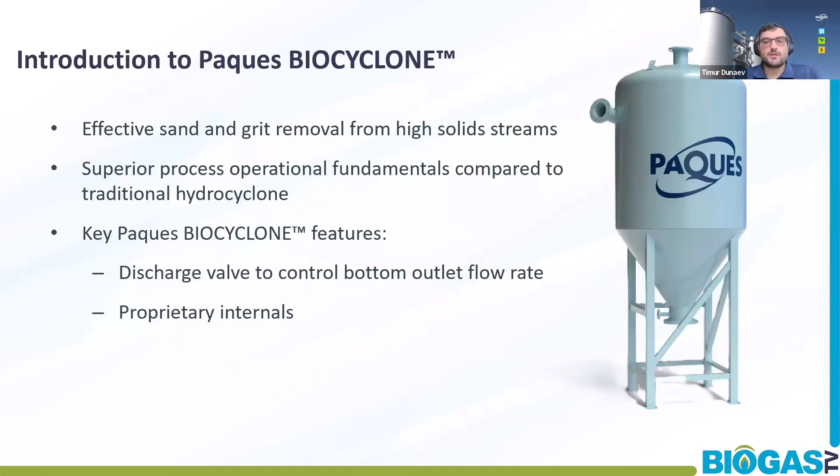All of that in one enclosed, well-controlled system, which is applicable and appropriate for biogas systems. Let's make a comparison. We remove solids by centrifugal motion, same as in hydrocyclones. But if you're familiar with hydrocyclones, the reason they're usually relatively small is because you do not control the back pressure. The main driver is the delta P across the hydrocyclone, anywhere from a couple PSI up to 20 PSI, depending on the application and what you're trying to separate.

The delta P across the pressure drop, combined with atmospheric pressure on the discharge side, is what's driving it. So when you go into higher flows or higher volumes, there are two risks associated with using hydrocyclones, even multiple of them in parallel. You do not have the thickening function, you'll be separating everything based on the difference in specific gravity and the amount of force applied, but then you're also losing the VS. What BIOCYCLONE and our specific operation, through controlling the bottom pressure, allows you to do is thicken the solids being separated and minimize the loss of VS. This is what we're trying to avoid in our industry—losing the VS, because that's where the biogas comes from.

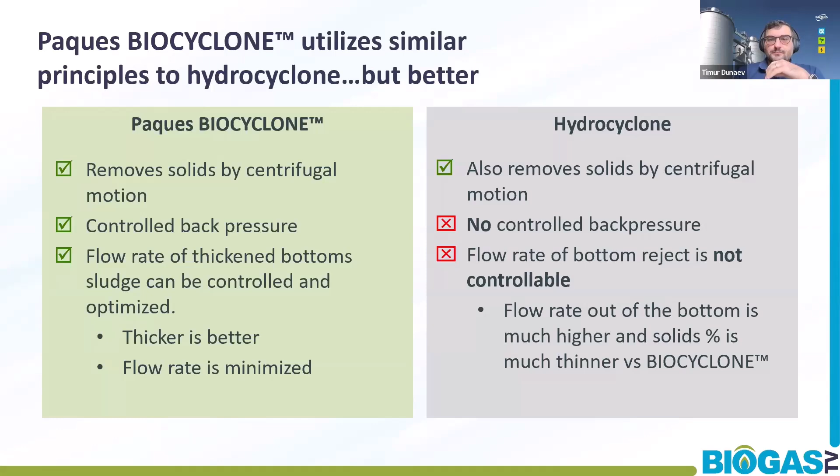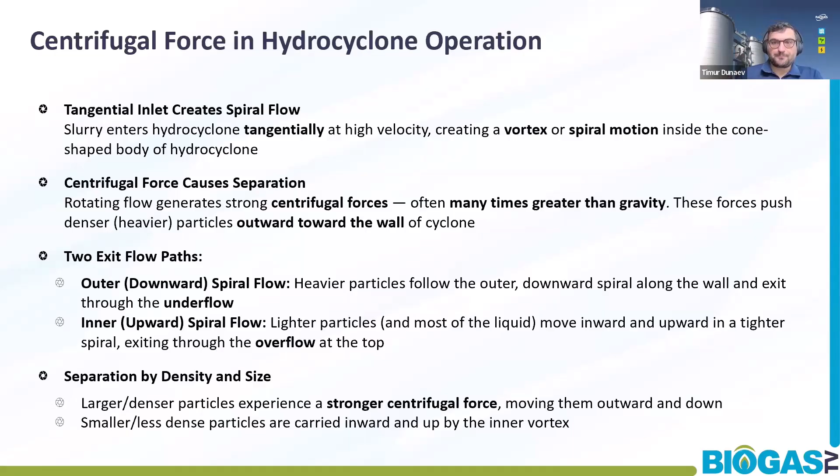So the way it operates, both in a hydrocyclone and a biocyclone, there is a tangential inlet that creates a spiral force on the inside. That force is what causes the separation, and then the clarified liquid comes out of the top while the separated solids go to the bottom. So this is the picture of how it works.

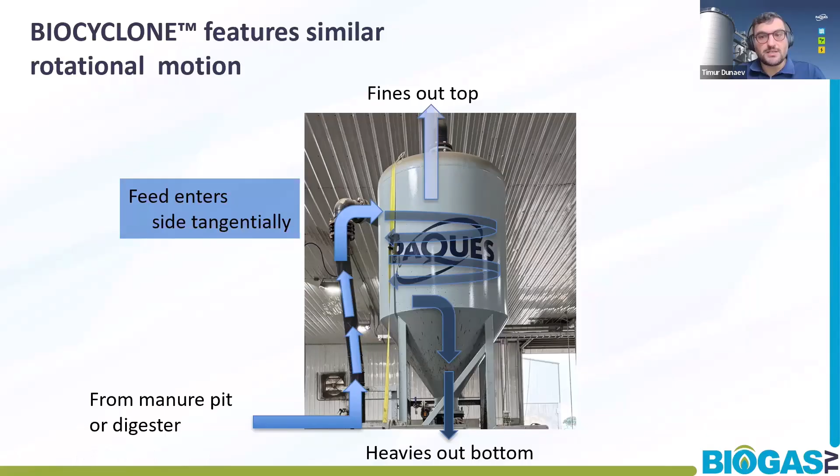There is no difference in the biocyclone. We have exactly the same flow path: a tangential inlet, separation within the system, and gravity force and centrifugal force forcing the high specific gravity solids towards the bottom while clarified effluent comes out.

And here is where the discharge valve discussion is the most important. Once you separate it, if you control the back pressure, you are able to allow the solids to accumulate within the system. What it does at the same time is thicken the solids, because gravity continues to work. And then when the time is right, which is determined from application to application, you're able to discharge the solids in a measured fashion.

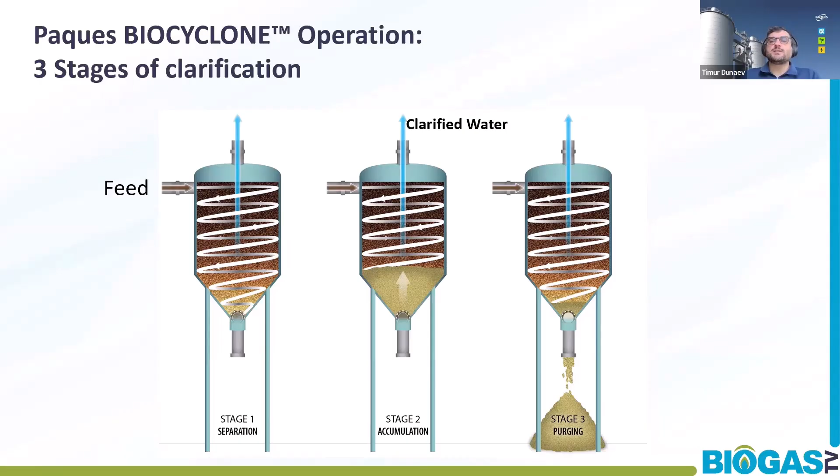You can do it both continuously and batch-wise. So depending on how much solids there are in the system, how much you're trying to remove, and how much time you have to thicken the stream, you're able to discharge in a controlled fashion. So it's a continuous process of clarification, but a batch-wise discharge of thickened solids.

This could be a good spot for you to remove the solids, in which case we try to apply 2 to 3 times the flow through the biocyclone. That allows you to continuously remove solids without affecting your forward flow overall in the loop. Once the solids are removed, all you're trying to do is remove the heavy grit without losing any VS, and then VS goes forward for anaerobic digestion.

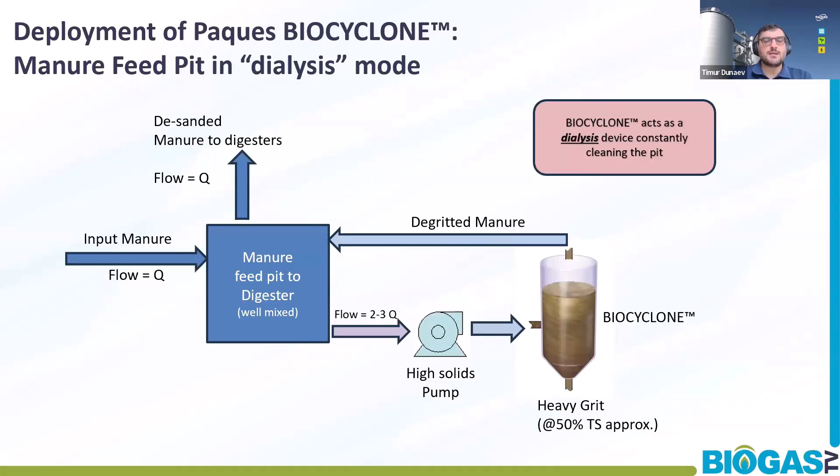So the mixing pattern is a plug flow pattern from top to bottom, enhancing the gravitational settling of the solids. You're able to pull from the bottom of the digester only the heavy solids, circulate it around the biocyclone so you can target the solids that have the potential to accumulate within the reactor. And if you've been in the industry for a while, you know the grit is going to accumulate on the bottom.

And depending on what kind of grit and what kind of solids you have, you can have multiple feeds inside of the reactor. This would allow you both to pre-treat in the dialysis mode I described in the slide before, and also keep your digester clean if there's more solid carryover on a continuous basis, effectively keeping your system operational.

Obviously, we have case studies. Obviously, we have photos. So I want to show you a couple examples of how this works.

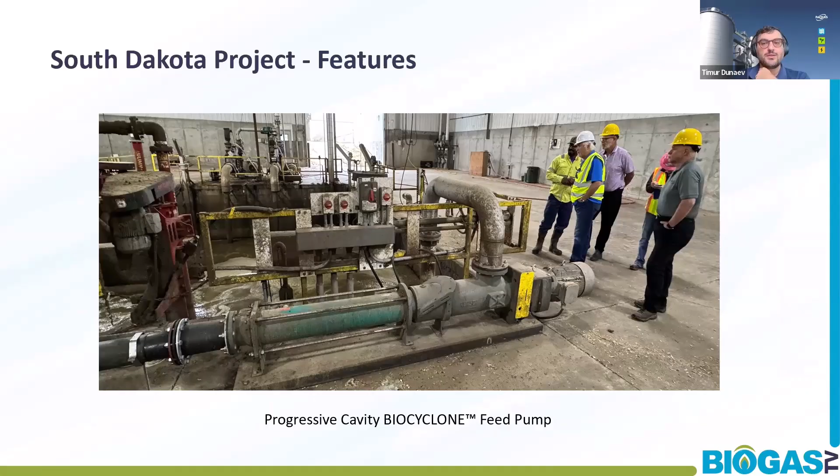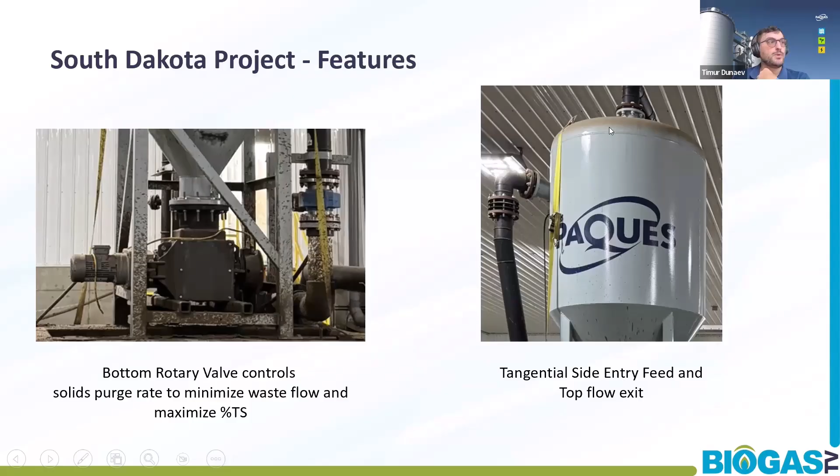Flow rate was around 400 GPM, average inlet solids at 8.1%, average clarified output is 7.9%, which seems like we didn't remove a lot of solids on the first look. The difference between 8.1 and 7.9 is not substantial, right?

But in reality, what we were purging from the bottom had 40 to 60% solids, better than any centrifuge you can imagine. That's a great indication the system was selectively removing heavy grit without affecting the forward flow and not losing any VS. Over 95% retention of VSS was occurring in the system.

Especially in the beginning, while we were processing the vast majority of the bulk of the sand, we were processing approximately 1 ton of sand per day.

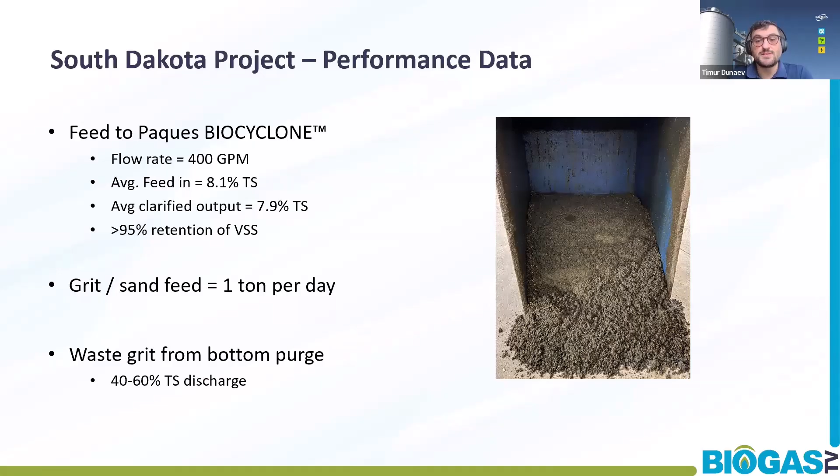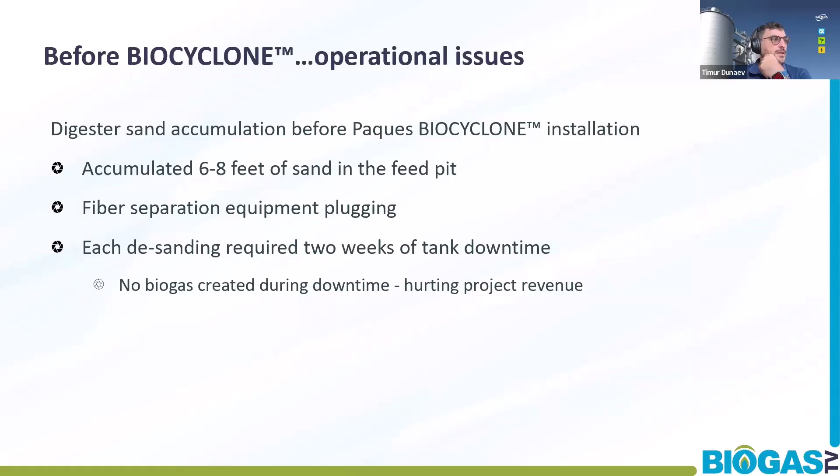Before, there was 6 to 8 feet of accumulation in the feed pit, fiber separation equipment plugging, and each de-sanding took downtime and cleanup time. We reduced it significantly.

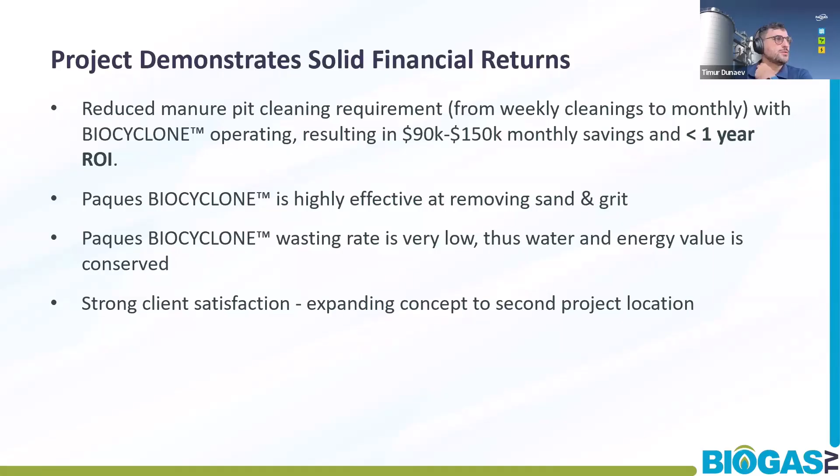Effectively creating less than 1 year ROI, and the client is very satisfied. In fact, we're putting another system in for the same client at another location. They're available to talk, it's just we didn't want to mention specific names in this.

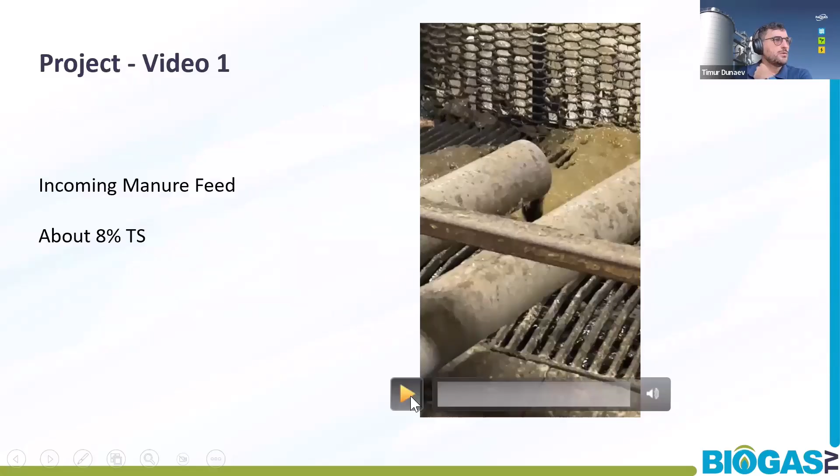So here's an example. Here is the inlet manure pit, right? I'm going to play the video, see if it plays. Basically, you see the 8% solids manure coming in into the pit through a coarse screen.

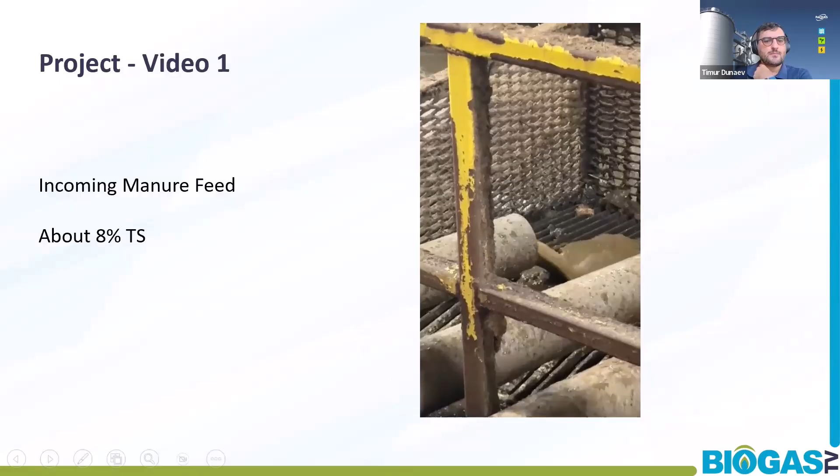This is the biocyclone installed next to the system, basically pulling from this pit and returning to the same pit. Right around here is the return line from the biocyclone.

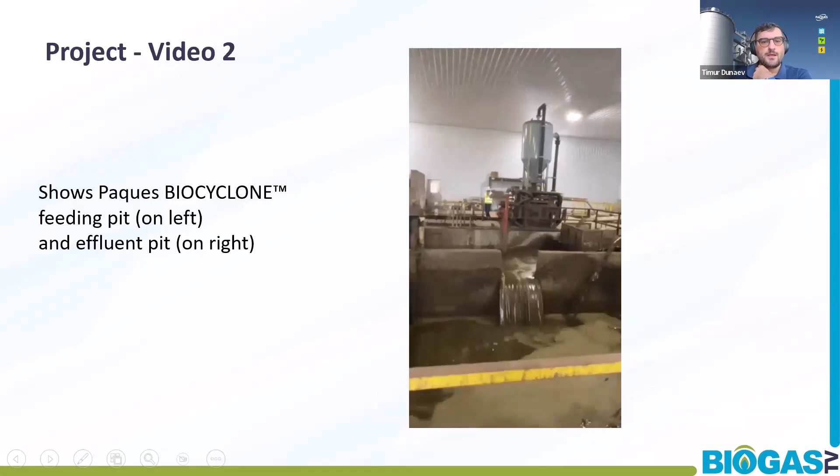Same video, sorry. And this is a control discharge of the solids that you can see.

I'm actually going to pause. You will see the solids dropping. There is a tiny amount of water on the top, literally less than an inch of any VSS on the top. Everything else is this coarse solids that you see settling.

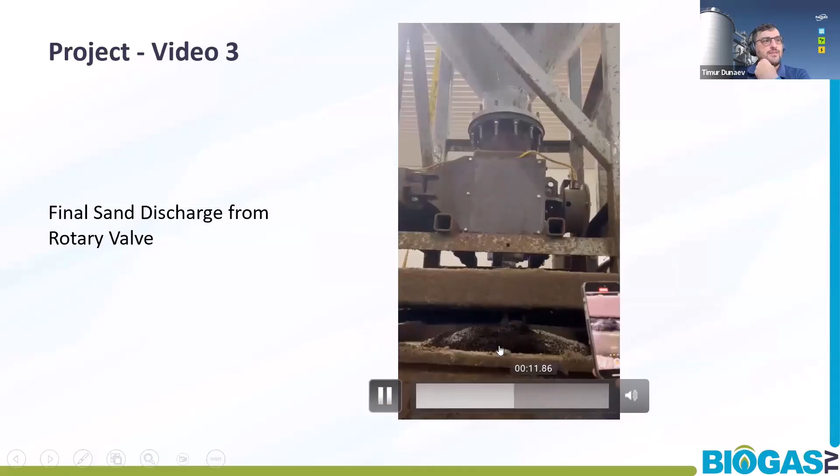So basically, the entire hopper ends up being heavy grit solids. You can see them falling down, a very thick control discharge of thickened solids in the operation.

This is the quality of the solids of the discharge. You can see both larger solids, and we have empirical data available on the particle size distribution and characterization of the solids - both larger particles and much finer compacted particles being removed from the system.

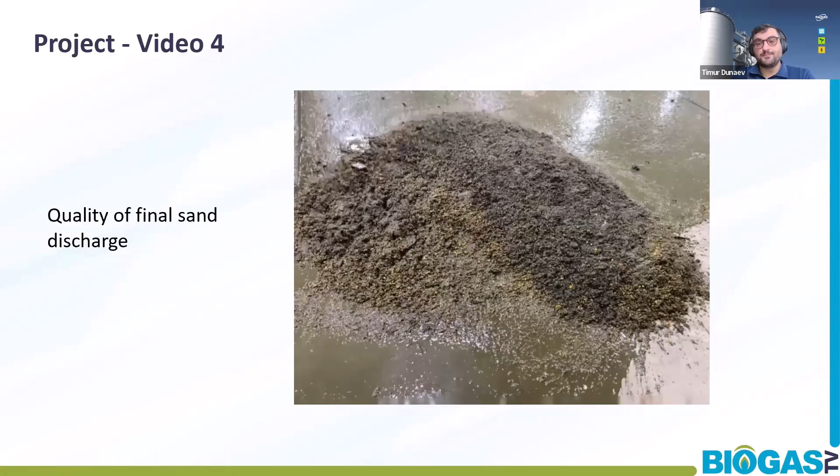That's basically the case study and the presentation that we have.

Good stuff. So there's our context.

So Timur, the product is obviously new. Where do you see things going as far as custom sizing versus standard options? Has Paques arrived at, say, any standard diameters, standard heights?

We've standardized on 4 different sizes right now, and we've seen the vast majority of the projects we've evaluated to date fall between those 4 sizes - from a 5-footer to an 8-footer for the biocyclone diameter, which takes care of anywhere from the low end of 300 to 400 GPM all the way into 2000 GPM. That covers the vast majority of dairies with more than 4,000 to 5,000 cows, which is basically where we see anaerobic digestion projects as well.

So again, you said 5 to 8 foot diameter. How much does the height vary as projects change in size? The height variance is not that much, it's right around 15 feet.

The biggest thing to solve on site is where do the solids go - are you going to be installing a hopper? Some clients prefer a retaining wall and a rail, and you install a biocyclone, with solids falling down on the concrete with a little bit of drainage so the front loader can take care of it. The system is very versatile from that perspective.

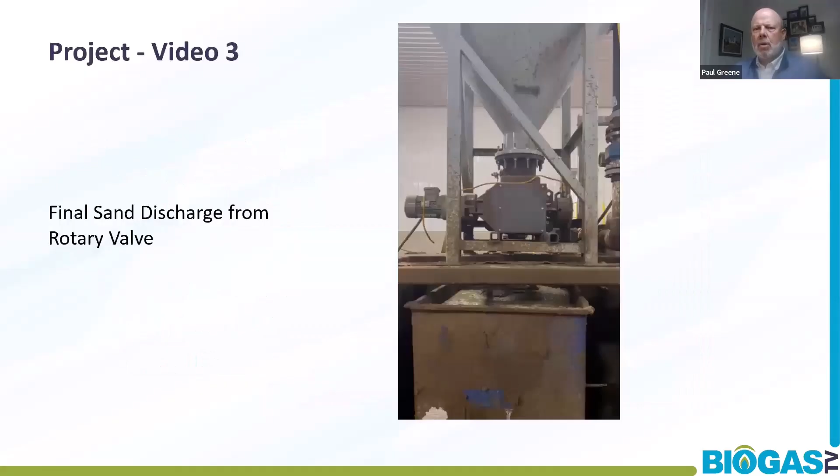The standard CBD comes with holes precast in the concrete and a rake mechanism installed on the bottom of the reactor that continuously directs the heavy solids into the precast holes. The entirety of the system drive is always located on the outside of the reactor. We never put anything on the inside because you need to be able to service it.

If the solids are not that heavy, we can also simply have a collection of pipes that collect the solids from the bottom. That is evaluated based on how much solids you have and how much heavy solids you need to be removing from the system.

So the standard application is a rake drive on the bottom, very similar to the rake of a clarifier that people are very familiar with - slow turning, robust construction materials, inverted gearbox that is fully isolated from the inside of the digester and fully operational and serviceable from the outside without having to stop the digester itself.

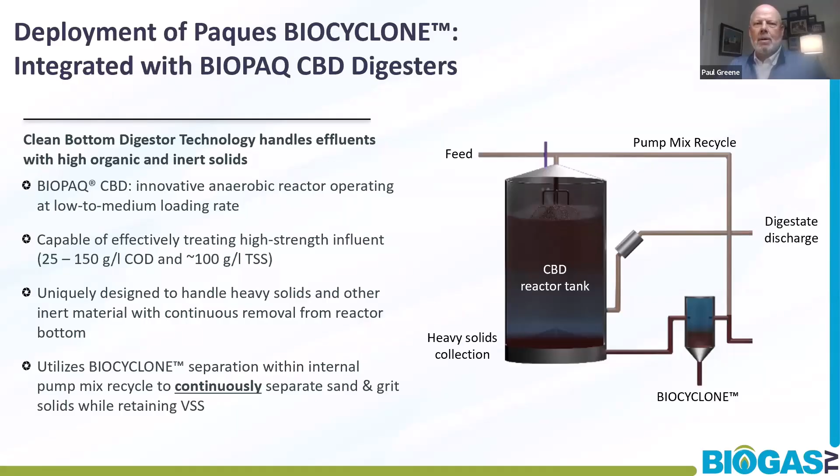A beautiful, simple, elegant design—some of the best designs are elegant in their simplicity. As far as mechanical parts go, there's only two moving parts: the pump and the bottom valve. Everything else is static, and the internals inside the biocyclone are designed and installed in metal. The know-how is the proper selection of material, application, and operations. Otherwise it's an extremely simple system, very easy to integrate, and especially for the dialysis mode, the integration doesn't stop anything in your day-to-day operations.

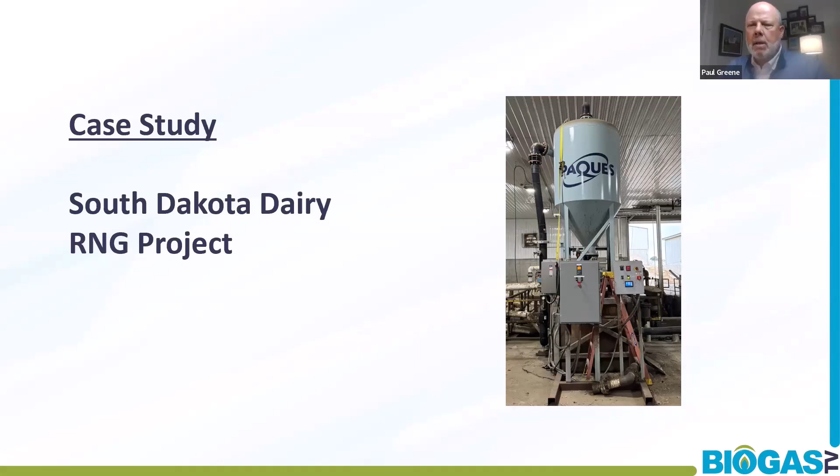Could you go to the next slide? The question came in: what kind of conversion are you getting in MMBTU per milk or cow for a typical sand-bedded dairy? This site has 84 cubic feet per cow yield from the digesters. Hopefully that answers the question—84 cubic feet per cow for the digesters. They were trending towards the lower side because the HRT was getting hampered by sand accumulation inside the digesters, falling behind to 15-16 days, which is sort of the cutoff.

But after the sand got removed and the digester got cleaned out, the HRT was trending more towards 20 days, and biogas production was trending in the right direction. The desanding we're talking about here is from the feed manure pit. They had to clean out the digester before the biocyclone was implemented because there were years of accumulation. We don't have data for post-biocyclone because there's no cleaning now, or it's very infrequent. Before that, there was more than 6 feet of accumulation in under 5 years. And the 84 cubic feet per cow figure is per day.